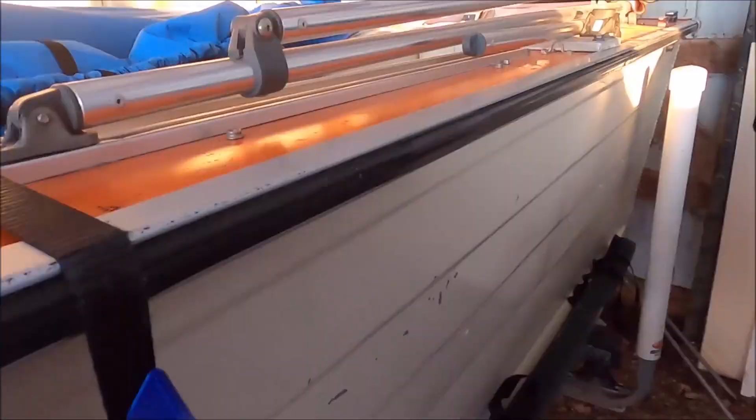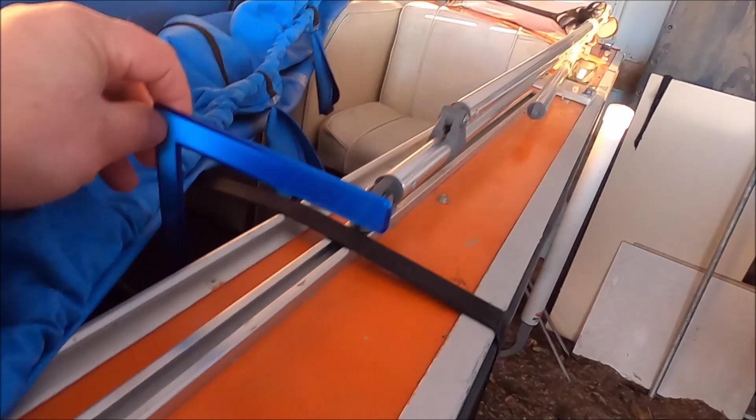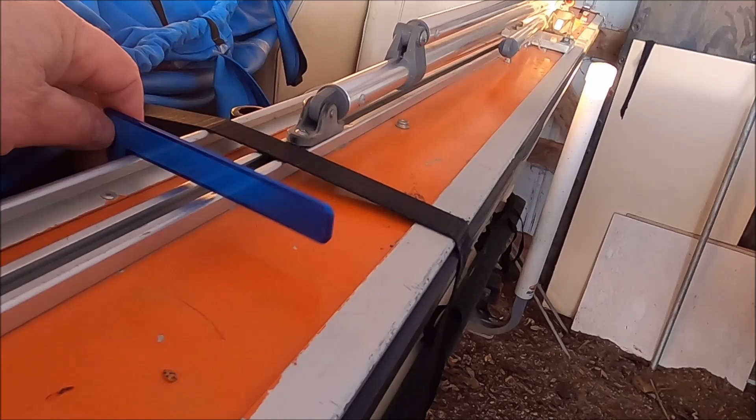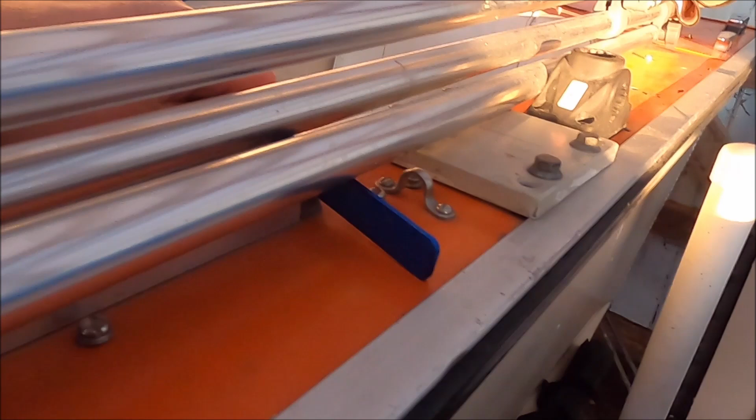Okay, so I got my old StarCraft here, and I want to do the same thing. So what I did is I printed me a 3mm thick profile of the shape I needed to hook onto the boat. It's kind of hard to see against this blue, but this will actually go in, and that lip right there is going to go underneath the hook underneath the gunnel. So when I put pressure on it, it doesn't try to lift up, and it'll sit like that. I think that'll work. Yeah, I can get it to work all the way down under here.

I want to put at least 3 supports on this boat, because I'll show you when the cover's on what it does. These are really great covers, but obviously they don't come with built-in support. You can see here how the middle sags down. On my Rinker, I got the same thing. It sags down the middle. So I'm going to do the same thing for both of these.

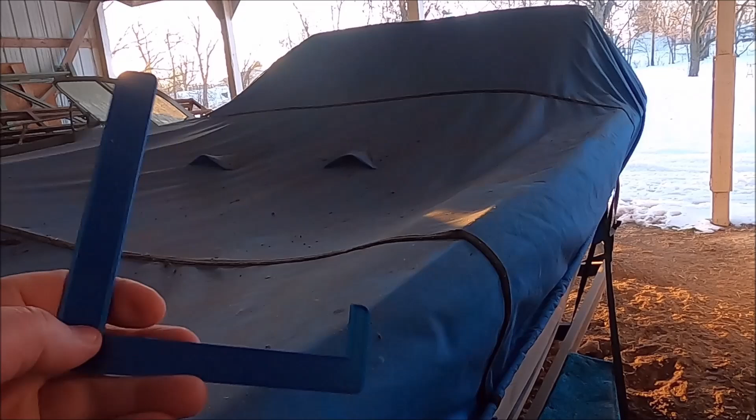I'm going to show you the profiles. Like I said, this is a profile that I did for my StarCraft as a test. I got a profile I did for this and a profile I did for the Sea Nymph to do all the same job. Now let's go inside and do some design work and print us off some pieces and buy us some PVC pipe and see if we can get this sagging problem taken care of.

Also got a similar situation on the Sea Nymph. The highest point right here is actually an archery stand that I stuck underneath there just to help keep water and things off of it and to get the stuff cascading off of it. But as you can see, the boat cover itself is too high. I can't suck the boat cover down far enough around the sidewalls as I'd prefer. So we're gonna do the same thing for that.

I'll probably print about 4 of those for this one, because as you can see, the front seat up here and this area right there is already supported. They're supporting the tarp pretty well. But back here, I want to put at least 3 to do the same type of action that you saw on the big boat. So let's get busy designing and building and printing, and we'll show you the results.

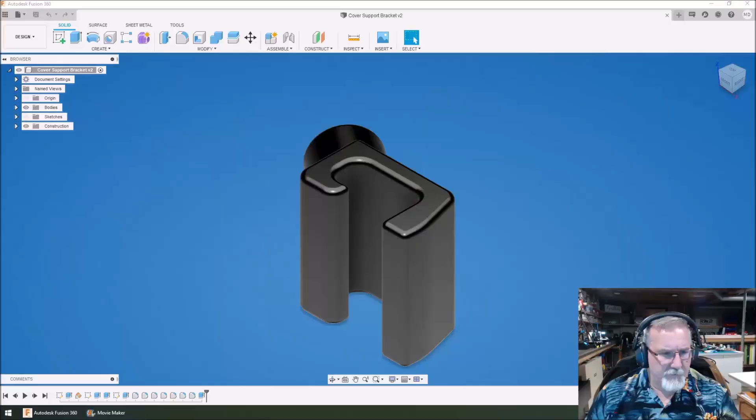All right, guys, let's get started here. As you can see, what I have on my screen is the one I showed you out there when I was out by the boats.

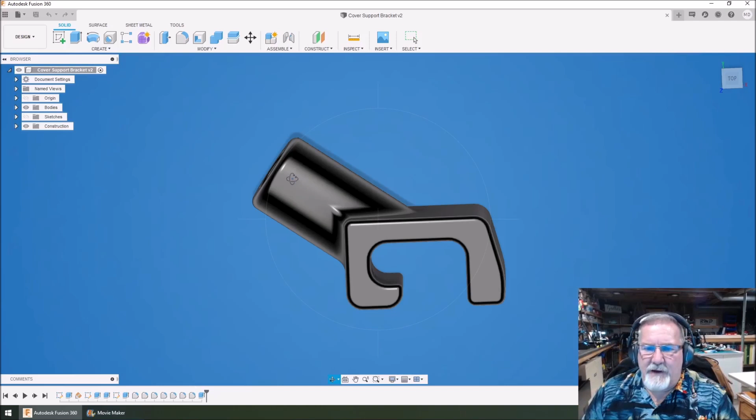This is a style for that, or actually in my intro, this is the style I created for the Sea Nymph. It locks in around here. It's able to take a 1-inch piece of PVC pipe right down the throat there, right through this hole, and create a support. Puts it at a 35-degree angle is what I got coming off of here. From this surface is 35 degrees up from horizontal.

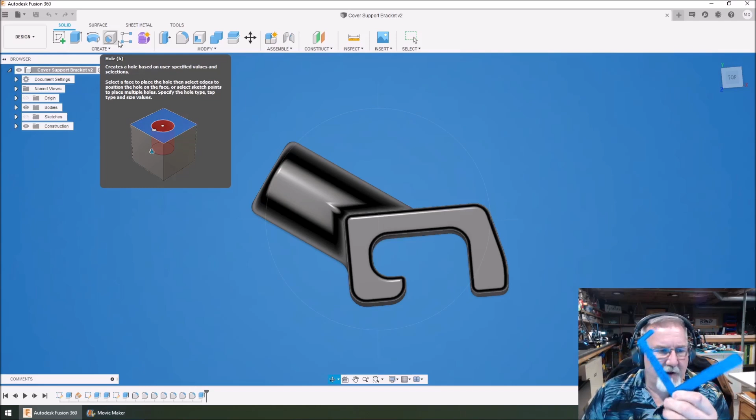Well, what I'm going to do now is, if you look down at the little caption here, I've got the one we just looked at on the StarCraft. This is my model. We're going to go ahead and open that up. So we're going to go in here, File, and Open. So I want to walk you through some of the things I do here. So I have, let's see here, StarCraft. I think I created one. Yeah, 18-footer right here, cover support.

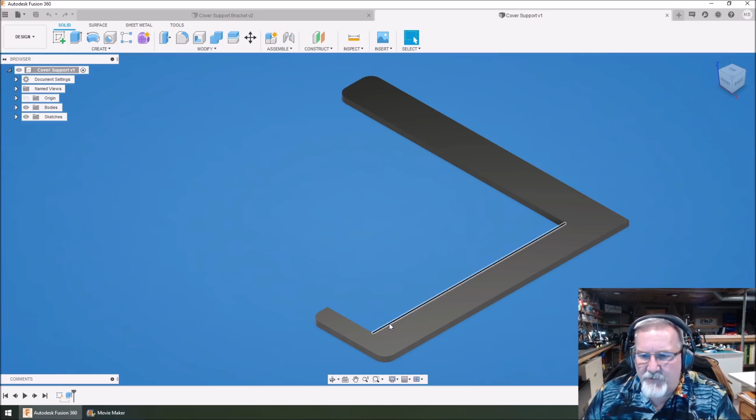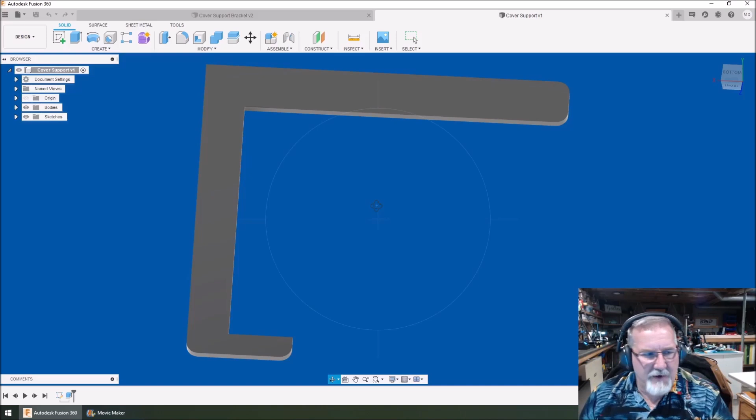So what I did when I printed that little sample piece there is I drew up the profile, kind of identified what I wanted to do, and then I printed me off a 3 millimeter thick piece, so I could kind of see how it was going to fit in its application. And once you like how it fits, because this is an easy way to get a real thing, to go up there and make sure your measurements worked out and feel that it's going to work like you predicted it would work. Cool part is, once you've got that drawn up, we can go back into our sketch here and we can edit the sketch. And here you see we've got the drawing that we created.

Now I decided that this bottom piece here, right here, does not need to be as long as I've got it drawn. Quite frankly, it could probably be half as long. The cool part is I can go into my dimensions here, double click it, make it so. Why did it make it 75? Why did that shorten up? Nobody knows but me. Okay, so I want that to be 75 millimeters long. Let me undo that real quick.

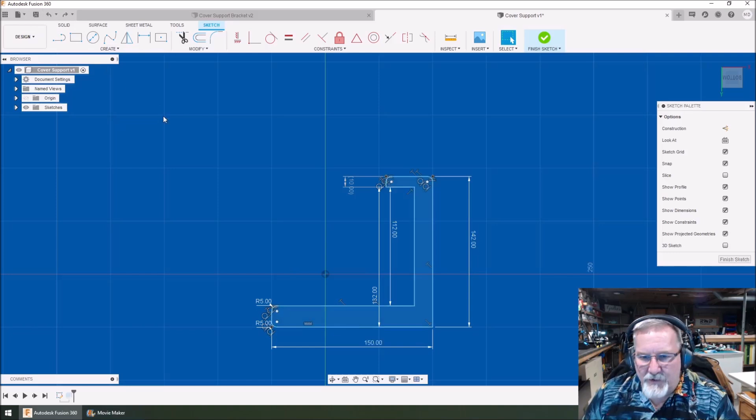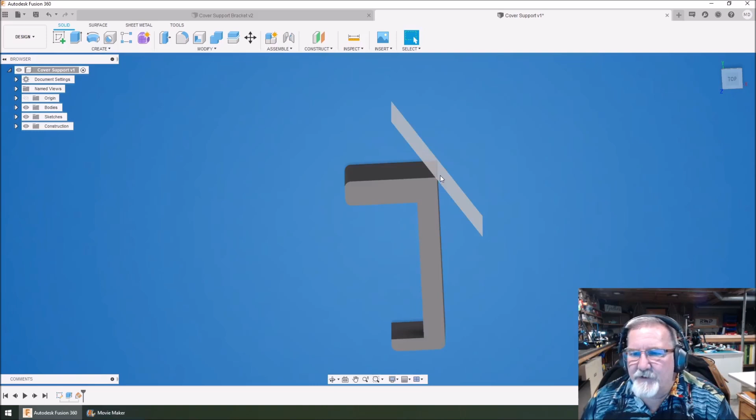So what I'm going to do is create another line here. We're just going to come down 75 millimeters long. And then I want to take this line and create another line here. Just going to click here, bring it down, just like that. Plug it in at 125, and that's the angle we want to project our, and we'll say, okay, we like that. Now we're going to go back into sketch mode. This is really cool and easy.

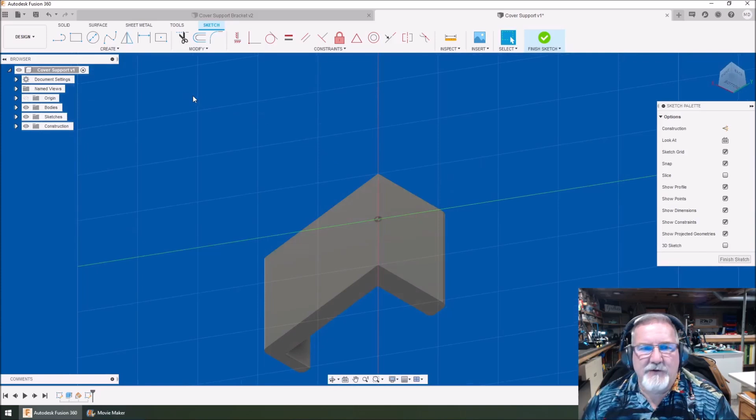We're going to click this and see how that rotates you around. We bring this back up. It's making you draw flat to that surface, so you can sketch whatever you want on that area. And as you can see, my origin is right here in the middle, which is really cool. So now what I want to do is draw a circle with a diameter of 50 millimeters. And then we're going to extrude that. So we're going to call that sketch complete. We're going to extrude it.

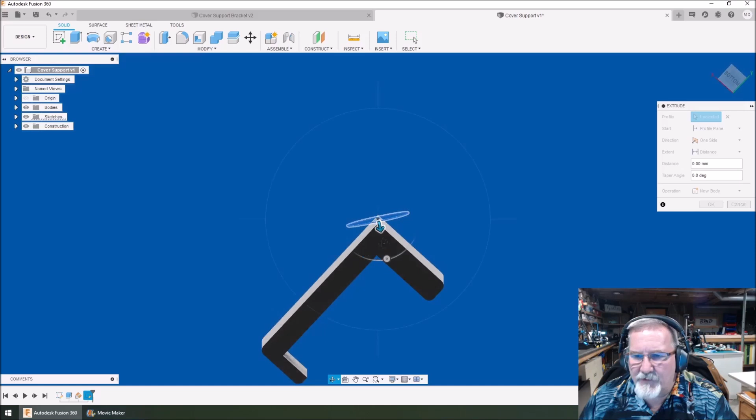And here's where, this is going to be kind of interesting maybe, because I want to bring it down until it blends into all this area. So I want to be able to just drag it till I see it blend off everywhere. And there might be a better way to do this, and you guys can leave a comment and tell me how you want to do it better. I accidentally hit a cut there. We're going to make that a join and hit OK.

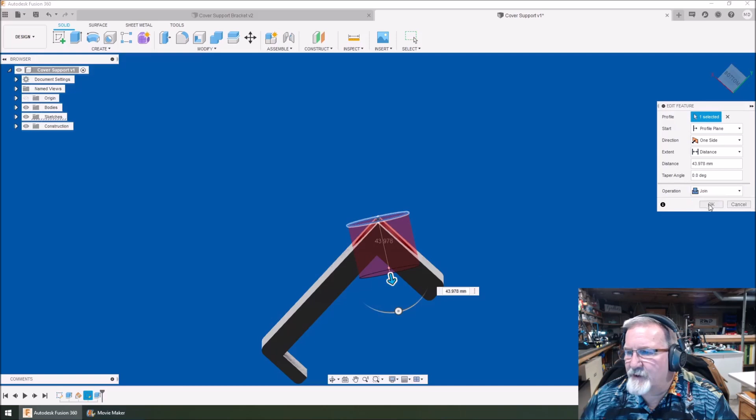So now as you can see, we got that feature intersecting that. Looking pretty cool. Now it sticks through here where I don't want it to stick through. I'll fix that here in a minute. Next thing I'm going to do is I'm going to extrude that same surface, and I'm going to come out. Oh, I've been doing this about 50 millimeters out.

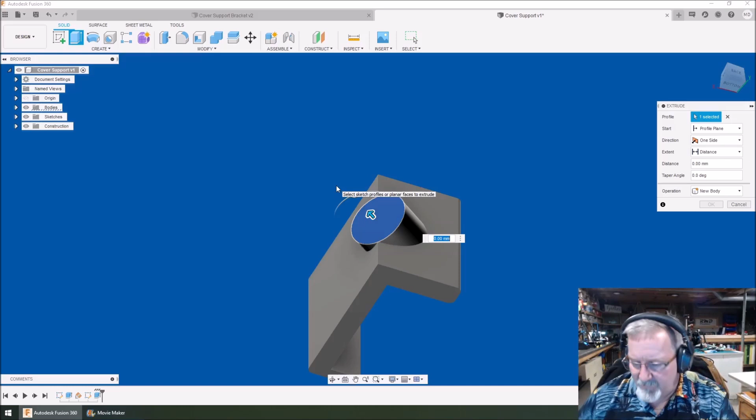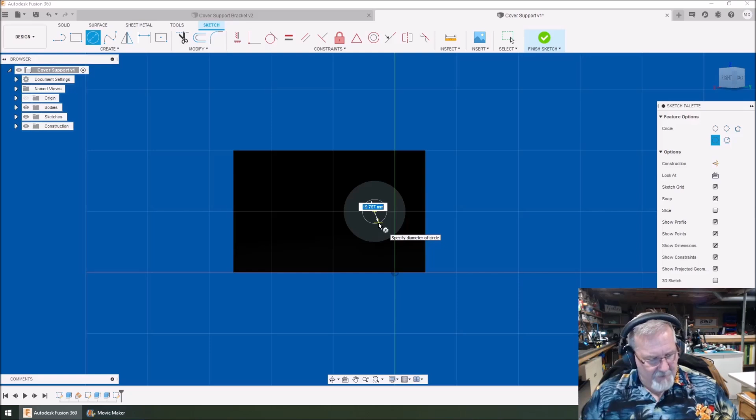And then I want to do another extrude off this surface. Nope, I got to draw a circle first. Sorry. A sketch, draw right here. We're going to do another circle, the center of that. Now our diameter is going to be what fits our PVC pipe, which is, I'm going to draw this at 28 millimeter. And then we can finish that sketch.

And you see how quickly we're generating this. This is happening at an alarming rate, I feel.

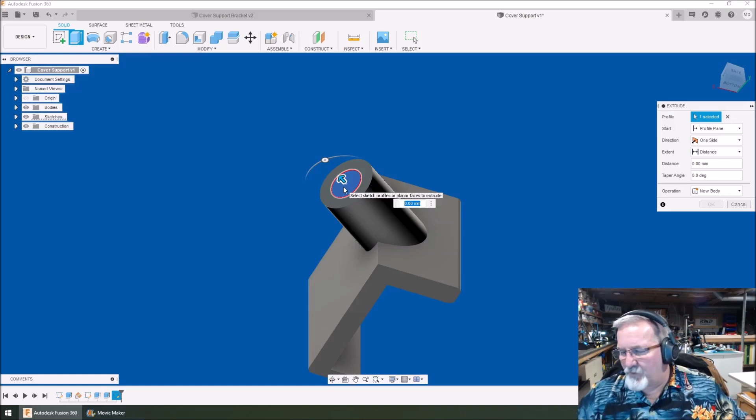It's my little joke. So what's been working pretty good for me so far is drawing this thing at about 40 millimeters deep. So we're going to minus 40. And we're going to cut it. And as you can see, we've got this thing rocking and rolling, ready to hook on a boat already, just about.

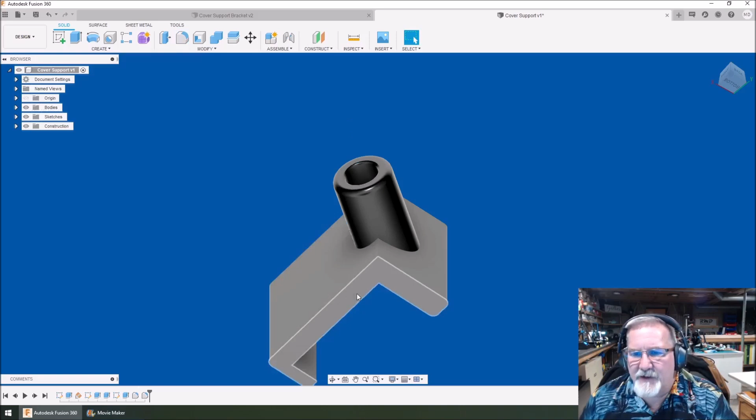Now we're going to go ahead and throw a fillet on here just to make this nice and soft on this outer edge. 10 millimeters too big. Let's go 5. I like that. We can put a little internal fillet here of about 1 millimeter, maybe 2, just to soften that edge up a little bit. Now here's what gets really cool. I'm going to go in here and put a fillet around this edge and this edge.

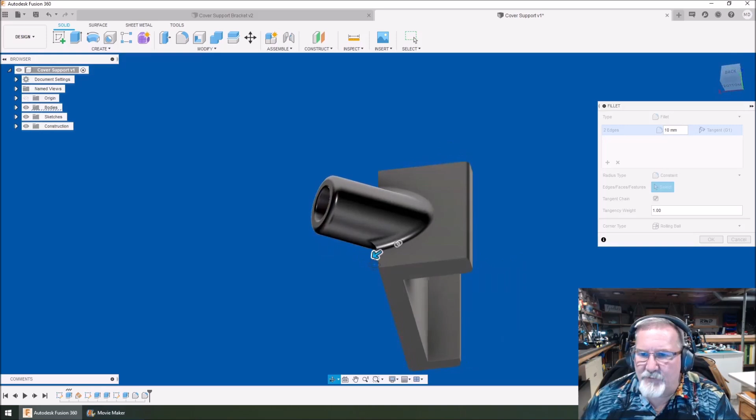We can make this fillet decent size. Let's just do a 10 looks like there. I got 10 drawn in. You know, that softens things up nice. Makes it a good blend. Plus it, you know, spreads that stress out over a little bit further area. Maybe we go 15. That looks pretty cool. I like 15. There we go.

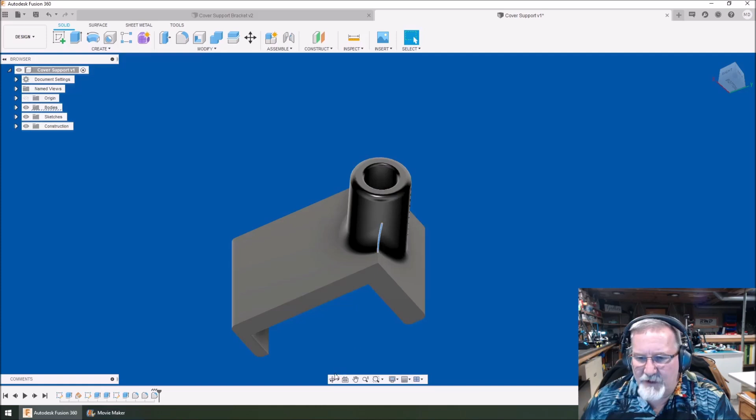Now, you see when you did that, we created another sharp edge there. I want to get rid of that sharp edge. I don't like sharp edges. So we're going to select that one, and we're going to hold the control key down. And we're going to select that one, and we're going to do a fillet there. Let's see if we can do another 15. Now look at that. I might have went too far.

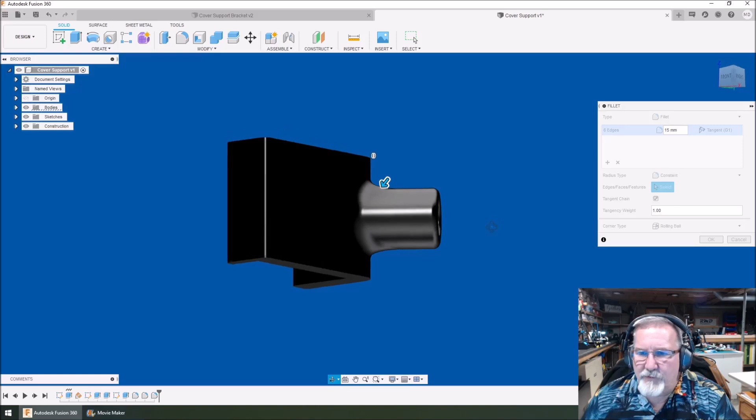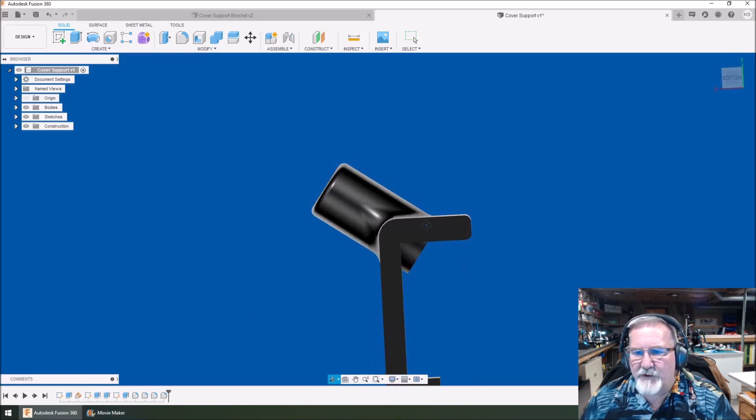That don't look too bad. That don't look too bad at all. See how sweet that looks? That looks smooth and swoopy. All right, very good. So we're going to lock that in. I like that a lot. Now you see we're developing something here that can hold our tarp support, our boat cover support very solidly.

And the stress here is this is going to hook on the underside here. It's going to grab and keep things from going, but it's the pressure outward. When you put this pressure on here, it's going to hold it up tight against this face here and this face here, which is what we're going for. This is just to help us keep it from getting away, and this also helps keep it from rocking back and forth while you're trying to mess with it. Kind of holds it underneath the edge of the gunnel.

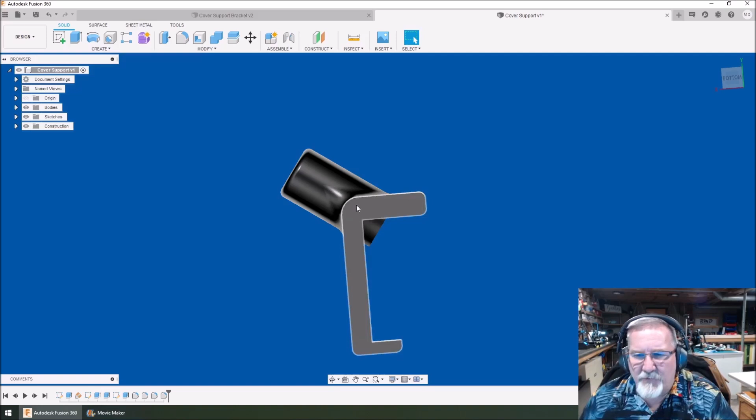So, because I'm going to develop another one here, honestly, that's just a 90-degree angle here with this coming off of it. I'm going to try that without any kind of underhooks. So it'll be more of a universal type fit is what I'm going to be going for.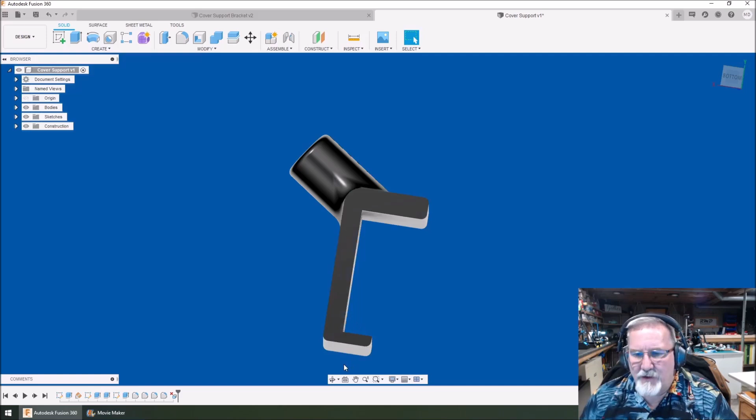So now you can see I need to get rid of this. This is the problem right there. What's interesting is it lets me select it. What are my options? Can I delete it? You bet. Just like that, it's gone. Clean, clean, clean, and done. That was so easy. Now, I want to put another fillet on here because I want to soften up all these edges that I've got.

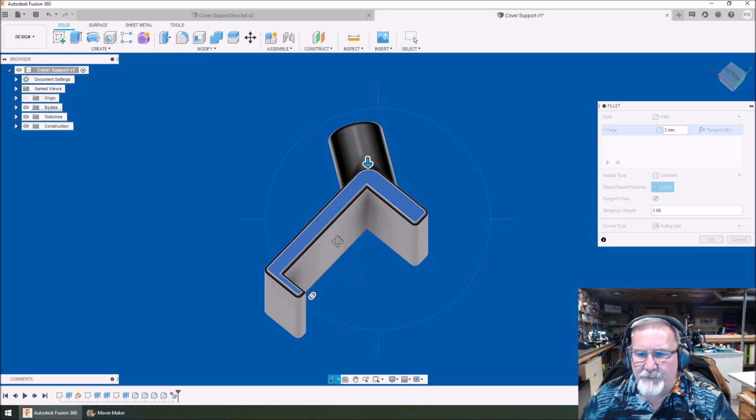Let's just select that surface there. Let's do a fillet. Let's see what 4 millimeters is like. Yeah, that's a little too soft, I think. Let's go 3 millimeter. Yeah, there we go. 3 millimeter, that's not bad. It gives me a nice soft edge. Doesn't have to be crazy. I like that. Let's do the same thing on the other side. Let's do another 3 millimeter.

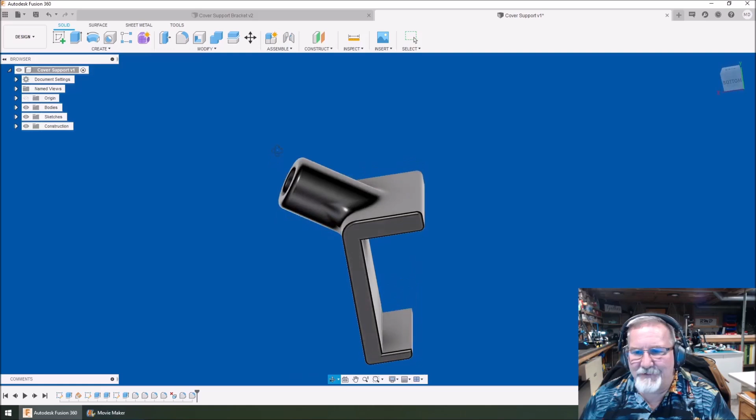We're done. This part's complete now. Ready to print. As you guys saw, that's easy. There's nothing to that. Now I'm going to show you there's two different ways to export your file. I'm going to show you a real quick and easy way, right here, which you can go to File, and 3D Print. And if you have one of these slicers, Mesh Mixer, Print Studio, PreForm, Cura, or a custom one, I've got Cura that I use.

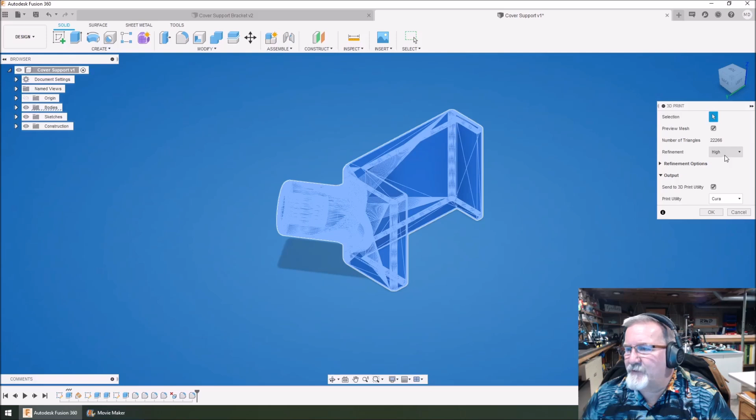I'm going to pick Cura. You select your object, just like this, and I'm going to do a high refinement, high quality. Hit OK. And what's going to happen here is you're going to see momentarily, wait for it, Ultimaker Cura is going to open up automatically now and plug this into it so you don't have to import it. There's advantages and disadvantages to doing it this way.

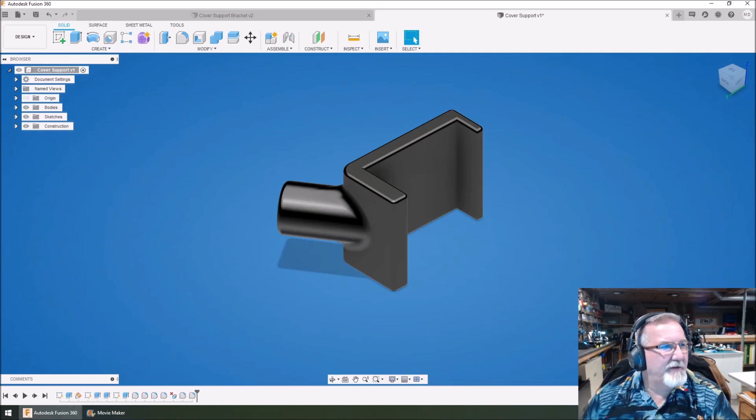So as you can see here, it's opened up and it's already placed it in my, right now I'm going to put this on my CR-10. So we're going to change platforms here, click on that. And as you can see here, now we've got it laid in here. Just the way we likes it, right?

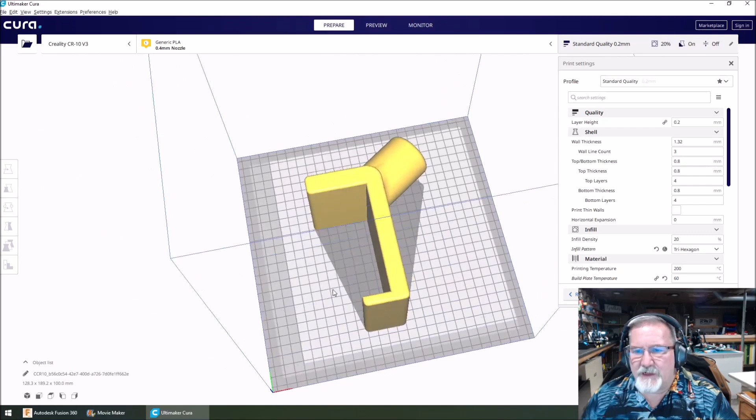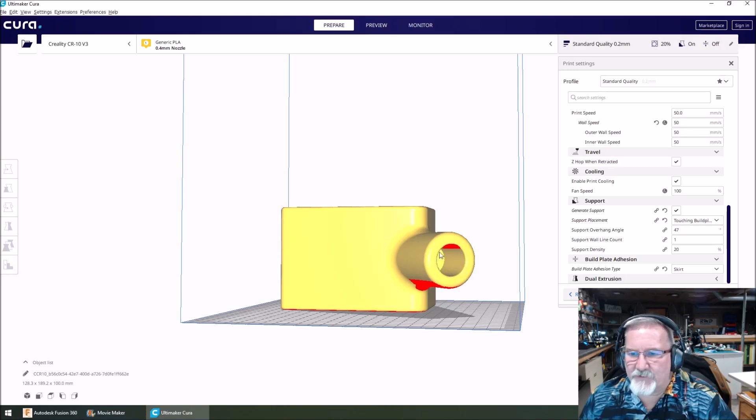But it's like, okay, I want to take advantage of my space I've got in volume, and I'm going to be away from the printer for a while, and I'm going to have time for it to do this. Now, I have tested this. It will print with, we're going to put some support here, like touching build plate. So it's going to put support here, but it doesn't need support here to create this circle. This circle will actually come up and close up fine and work.

You know, it might not be the prettiest along this edge, but it's a bracket boat cover support. It doesn't have to be completely 100% pretty. It will hold the pipe and it's got strength. But I want to nest two of these together, and I found out that I've printed a few of these, and they work really well.

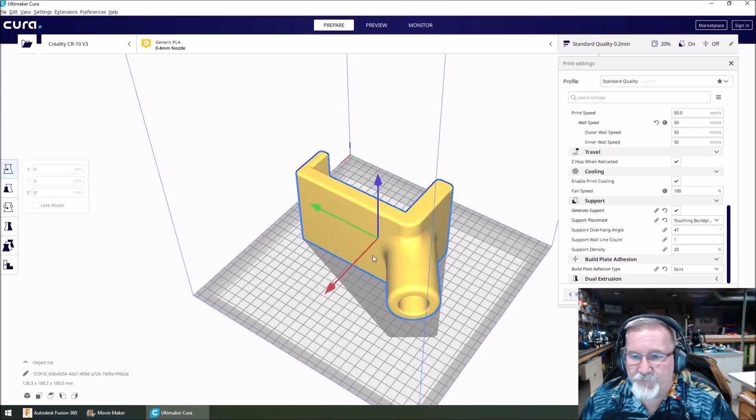So what I'm going to do is right click here, multiply the selected model. I want to make two of them, and it's going to throw me another one out here. Uh-oh, look at it. It don't fit. It's not in there. Boom. I'm going to move it in there. Oh, it did me two. I should have did one.

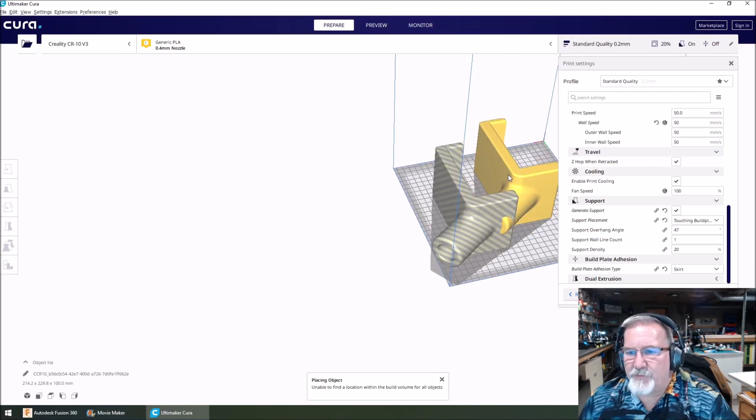But what you got to do here now is I want to move this one. Let's just move it around in here a little bit, get it inside the build platform. Then I'm going to select this one. We're going to rotate it. We're going to grab this little circly-dirkly thing here, and I'm going to put it right there. Then we go back to my move feature. We're going to move it, and we're going to nest it together.

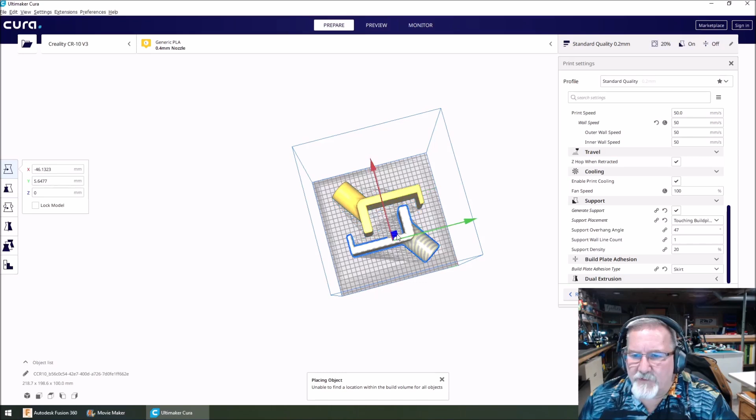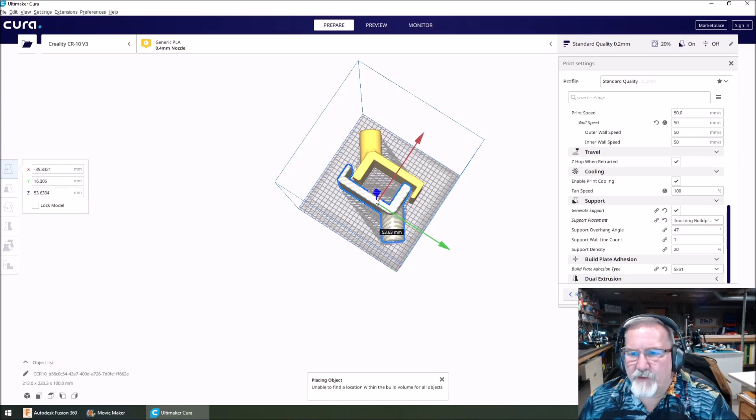Now, it's saying it doesn't fit, but I know it does fit on my. Okay, let's just move that over a little bit. We'll get it in there. Don't you worry. Boom.

Oh, I'm up in the air. Help. I'll go here and put Z in, drop it down to the bottom. You see now it's touching the build plate. Look at there. Now we got those nested together nice and tight.

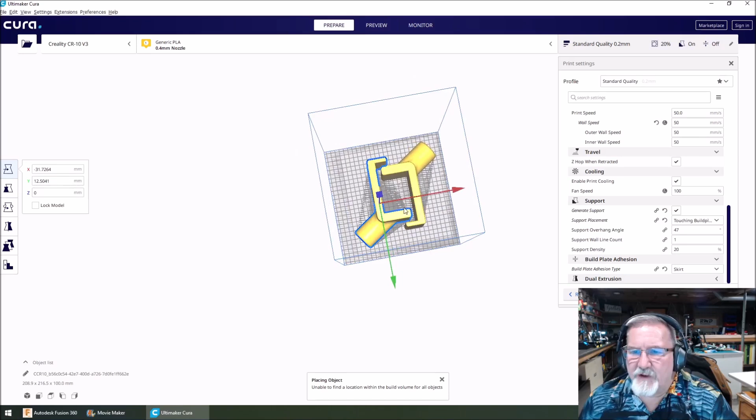And now what I've been using here, just so you guys can see, I'm running a layer height of 0.2, just standard quality, wall thickness of 1.32, wall line count is 3. Seems to be working pretty good for me. I could go heavier if I feel I need to. Using a trihexagon infill, 20% density. Running my print temperature at 200 degrees Celsius and 60 degree on the build plate temperature.

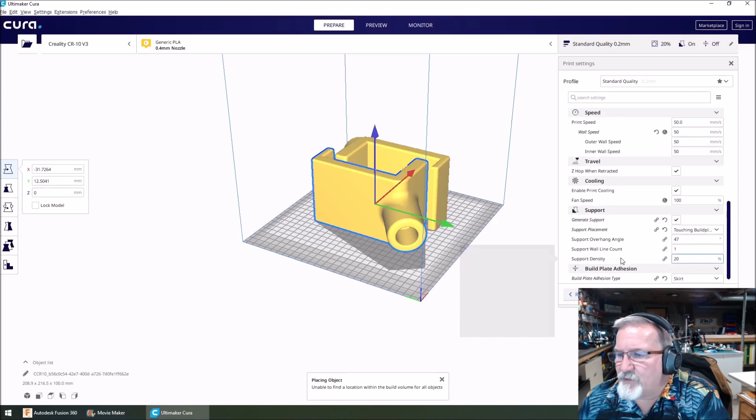I've got my retraction set. It should only be, honestly, 5 is more than enough on my CR10. Retraction speed of 40, but I'm running my outer and inner wall speed of 50 to try to speed up my print time. And I do have support on the build plate. And basically what that does is support this area right here.

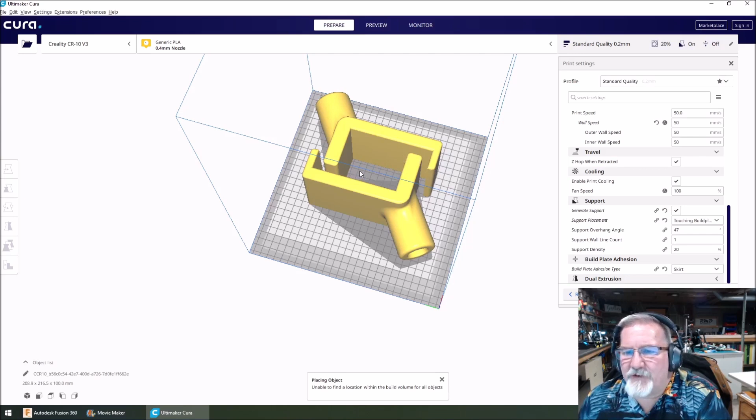I had been printing these things on some of my other ones with this part pointing down when I had this bottom and this bottom here, or say here and here, straight across from one another, and I'd use an infill here. That's why I tried printing it this way, because it takes a lot less support material than it does when you have to try to put support off here to create this big long flat. Plus, with these lines running this way around this thing, it provides a lot of strength, which is what you want.

You want to look at your type of build you're doing. We're going to do a skirt, no brim. Don't need any of that crap. It's not necessary here. So we've got everything the way we want. Let's slice it, and you'll see when it's done slicing. We'll see how much material it's going to take.

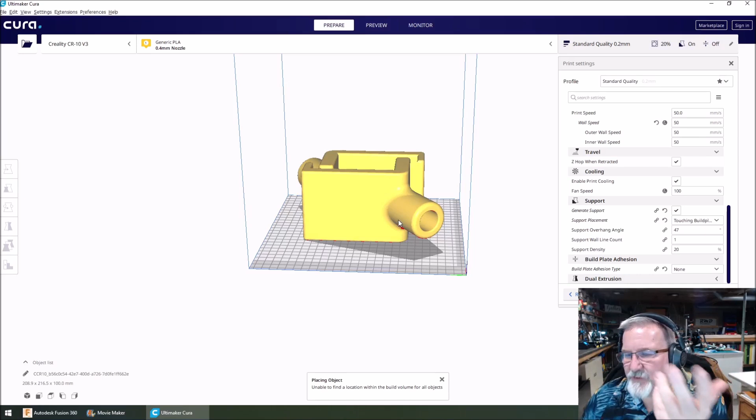So I know how big a spool I need to put on there, because I got a bunch of partial spools. Like this is going to take basically half a spool, 430 grams to print these two. So in this situation, you're looking at about $10 worth of material for 2 of these. So that's not bad. It's going to take 1 day, 9 hours and 36 minutes. This is no short print, but hey, this gets to do a lot of work when I can do a lot of work on other things.

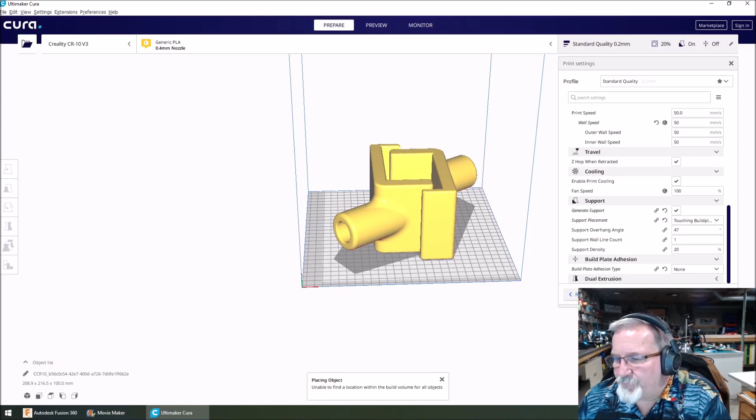Honestly, if I had all three of my printers going, I could basically print 6 of these, have a set ready for a boat in no time. So I'm going to go ahead and save this to my file, and since this is for my StarCraft, we're going to call it StarCraft.

I had one, that was my test code. I'm just going to take off test, 18-foot cover. I'm going to let it know that this is 2 pieces, so it's going to do 2 at a time. We're going to save that.

So let's go back over here to my CR10, which is sitting and waiting. We're going to go ahead and upload that file, 2 pieces. Boom, yeah. 2 pieces, it's in here. It's ready to go. Let's hit print. And it's off to the races. That's all there is to this, folks.

I'll do this again for the Rinker. I've got the same kind of thing on the camera here. I've got another one here. I had to write stuff on it so I wouldn't get them mixed up, but got a similar one for the Rinker. I'm going to do the same thing here. I'm going to cut this off a little shorter, saves on material. It's not necessary to have all this material up on top. And we'll put it to the printer and let her rip.

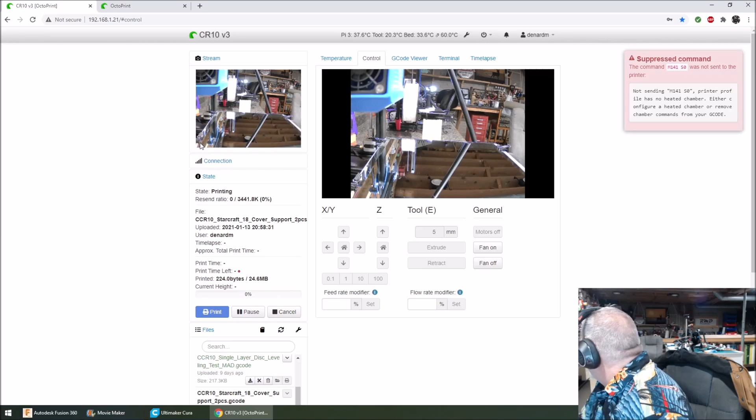So I'll be back with you when I have parts in my hand and I can show you how they turned out. And on top of that, I just realized I started a print. I don't have enough on the spool, I'm pretty sure. Huh, it might be close. We're going to let it rip, Tater Chip. All right. We'll be back when we have the parts in hand, and then after that, we'll show you the application and the results of them being put underneath the cover.

All right, let's take a look at some of the things I've printed for the boat cover bracket support stuff. So I have one here I designed for the Sea Nymph that's going to fit over that little piece that runs around the top of the Sea Nymph. This is a piece of 3/4 inch PVC. And you can see how that's going to go there, and that'll hook on both sides of the boat, and then there'll be the second one on the other side, and there'll be a nice arch between them.

I'm just printing out of any color I've got. I printed 6, count them, 6. They bounce. All right, that was the durability test you just witnessed there.

Anyway, and then I've got this style here. They'll be on the boat like this, for my StarCraft, I'm gonna try those on it. And then I'm gonna have my universal one. Now this one's interesting because it's smaller overall. It's gonna have Velcro in here, and it'll be Velcro on the boat. So when these are sitting the right way here, like this, squared up on the boat.

Shop's a blooming mess ever since I got the boat out of here. I got to get my stuff reorganized now.

As you guys can see, the big old 22.5 footer is doing well with the tarp supports, or the cover supports. It's taken on a little bit of snow, and as you can see, if it was to rain or anything else, it would just cascade off of there.

Hello, outdoor kitties. These are my outdoor mousers. How you doing, buddy? I just fed you.